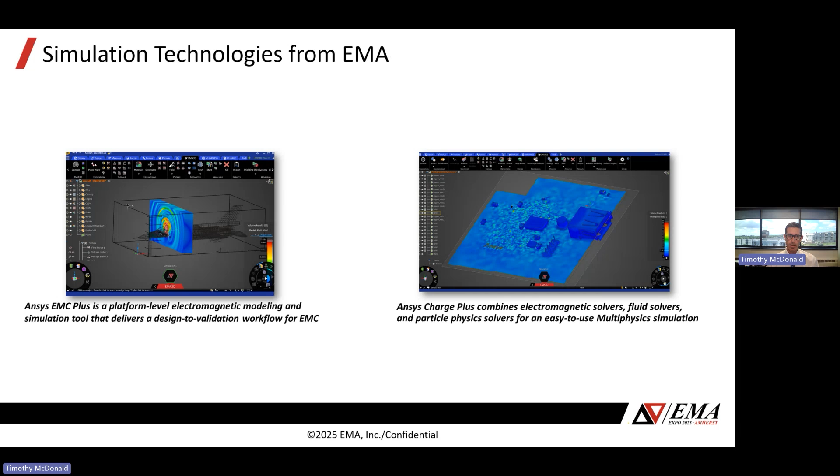Ansys Charge Plus is a tool that combines electromagnetic solvers, fluid solvers, and particle physics solvers for an easy-to-use multi-physics simulation. So this is a tool that's about extreme multi-physics, but doing so in both an advanced way and a way that's approachable and easy to use by users.

So the value proposition for EMC Plus, our goal is and has always been to be the fastest time to value. So whether that's simulation time or just the analyst time to build the model, we're always looking for ways to reduce the time between the engineer posing the problem and getting to a solution.

So that's not been an overnight thing. It's taken many decades to chip away at some of the technical challenges that get us to where we are today. So the key contributors to that short time to value are the ability to work with extreme geometric complexity.

By using a forgiving mesh, we use a grid-based mesh, and then we use hybrid subcell solvers. I'll go into detail in this first hour of this presentation about what some of those subcell solvers are, and that allows us to get the extreme complexity we're after in the shortest period of time possible.

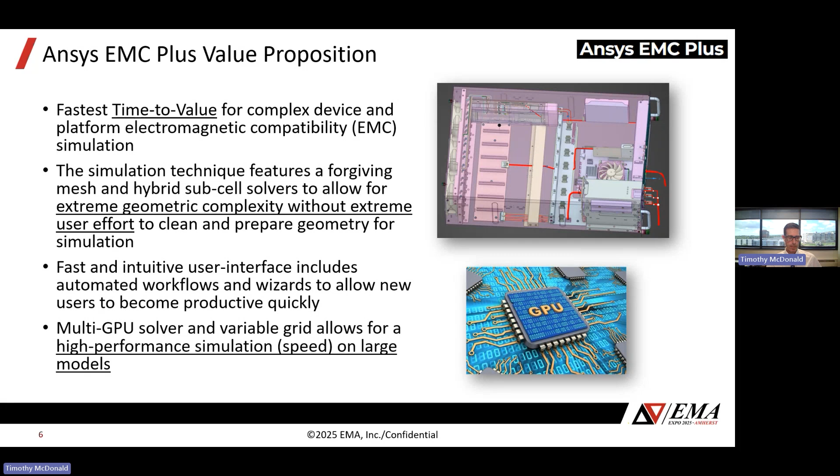And of course, that user interface matters to that. So it has to be intuitive. We have to have automation in those workflows, and then the solver itself needs to allow for high performance simulation on large models. And these days, that tends to mean accelerators like GPUs.

All right, so first example of an EMC Plus simulation that we would be going after would be just a basic electromagnetic compatibility of a system. In this case, we have a printed circuit board.

It can be a multi-layer board. That board can have components. Those individual traces into nets. In this case, some of those nets terminate on the end of cables. Those cables pass to the edge of the enclosure and then are shielded outside the enclosure. And there's a connector that interfaces the shield of the cables and the cables themselves to the enclosure.

And then fields emanate from excitations on the printed circuit board. They may go straight out the apertures in the enclosure to the receive antenna, or they may flow on the cable, go through imperfections in the shield, and then emanate toward the antenna. So there's many things happening.

Again, this is indicative of the types of extreme geometric complexity typical of EMC Plus models and the types of things we'll be solving. So I'll talk about some of the fundamental things that allow us to do this type of simulation in this presentation. Some of the later Expo presentations will go through the steps to set this up in the software itself, but today we'll be focused on the theory.

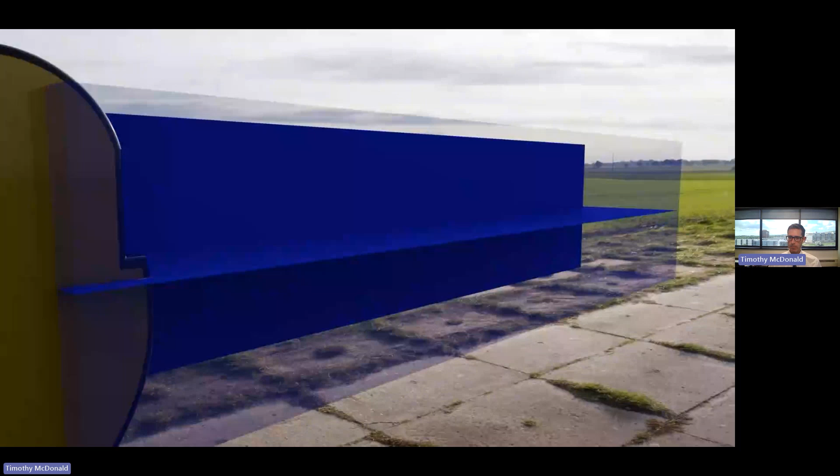The second example that I'm going to show is larger devices. So with EMC Plus, sometimes we're looking at consumer electronic devices or line replaceable units inside larger devices. But EMC Plus, with its extreme geometric complexity, can be used to model full vehicles, cars, industrial equipment, buildings, plants, things of that nature are computationally amenable with EMC Plus.

And in this case, this is a specific absorption rate simulation where an antenna that is mounted on the car in the shark fin creates electric fields that couple into the human body model. So this just gives another example of full platform extreme geometric complexity that we can pursue with EMC Plus.

Charge Plus, which Brian Neufeld's going to talk about in the next session, this is multi-physics and it's co-simulation. The goal with Charge Plus is to be accurate where needed. So it's using some very high fidelity solutions, connecting kinetic solutions with electromagnetic solves and extremely short time steps where needed.

And then where you don't need that extreme level of detail, we can relax some of those constraints and go for performance the rest of the time and make it more computationally feasible.

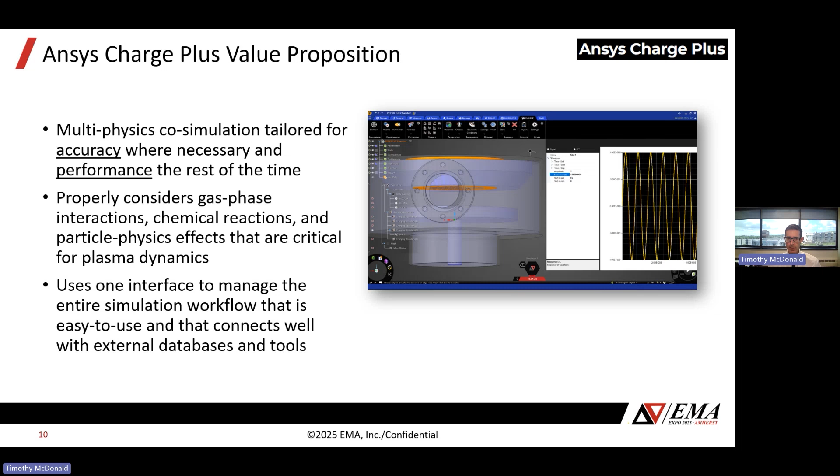This tool can consider gas phase interactions, chemical reactions, and particle physics effects that are critical for plasma dynamics. And you get one user interface, and all of it is well connected and modern in its feel and works well in connection with external databases and other Ansys tools.

So an example problem for Charge Plus that we'll hear more about this week, this is a plasma enhanced chemical vapor deposition cell, and we're seeing electrons inside this cell respond to the RF fields that are setting up this plasma.

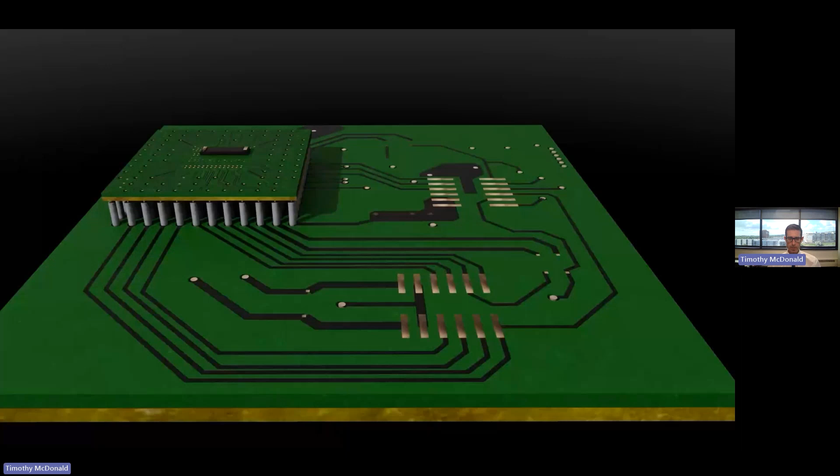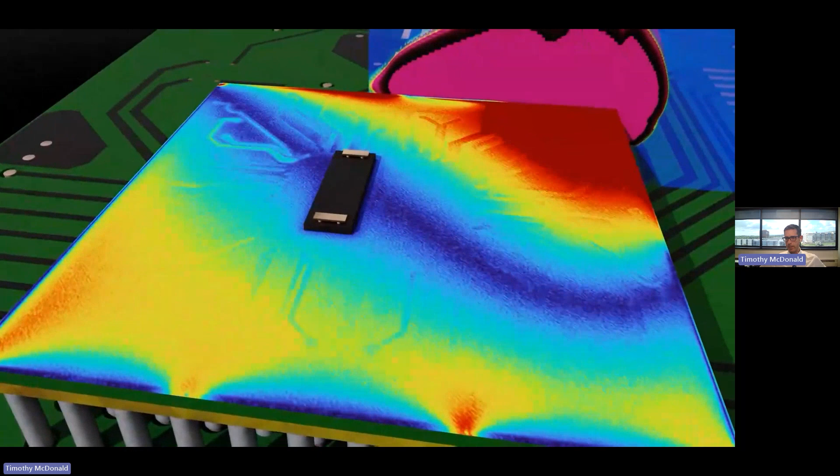Another example of the use of Charge Plus is using the FDTD simulation in Charge Plus. In this case, that's the ability to model a non-contact ESD arc. So this ESD arc creates an electrofluid interaction, and then we can see how that couples to PCB traces, nets, down to individual interposers to look at the voltage and current induced on those by that nearby non-contact ESD event.

So a couple of examples of the types of plasma arcing problems that we might try to solve with Charge Plus. All right, so for the rest of this session, I'm going to talk about some of the advanced concepts and theory for EMC Plus. So first, we're going to talk about some of the history of that.

So the first approach to the finite difference time domain, which underpins one of the solvers inside EMC Plus, was Kane S. Yee. He was a professor, also worked at Lockheed, and at the time, the innovation was to take the grid of fields in space for electric fields and magnetic fields and offset them by half a cell in the grid in X, Y, and Z. That overcame some limitations of just a naive discretization of Maxwell's equations, where the E and H fields fell on the same grid.

And the genius of that and some of the practicality of that can be seen if we just look at the individual step equations. So the step equations are just the discretized versions of Maxwell's equations. So one of those field step equations, the next time step for H in the Z direction is based on E in the Y direction and E in the X direction on either side. So you can see by staggering the grid, H of Z is right here in the center of the face, and the E fields are on the center of the edges.

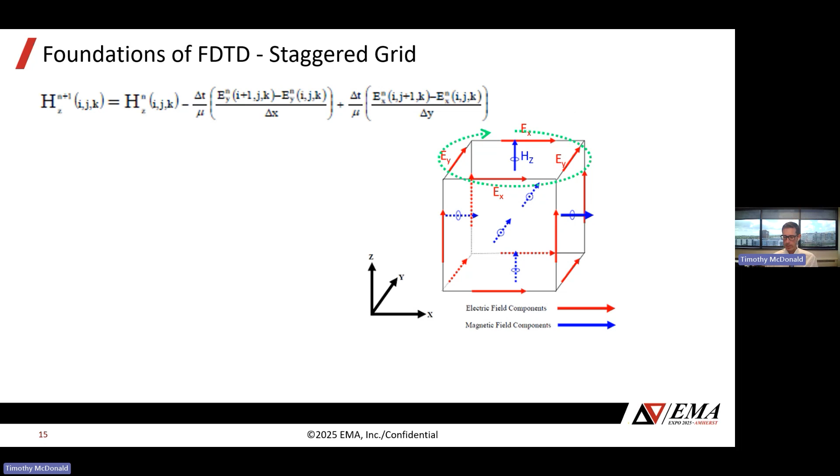So I need to difference this E sub Y and this E sub Y, and then in the second term, I need to difference this E sub X and this E sub X, and they're as close as possible to being on either side of the H sub Z. So the spatial error for that separation is minimized when we stagger the grid. This is the easiest way to visualize what we mean and why we would put together a Yee grid, named after that professor I mentioned on the last page.

And this method had another big advance by Lam in 1969, who did the work necessary to derive the condition for stability and the CFL condition, and found that as long as certain criteria are met, such as the Courant criteria, which I'll talk about in a little bit, you can guarantee convergence under those circumstances for these equations. So that really gave us the mathematical underpinning to be confident in further developing this tool and being able to use it, knowing that we'll see convergence when those criteria are met.

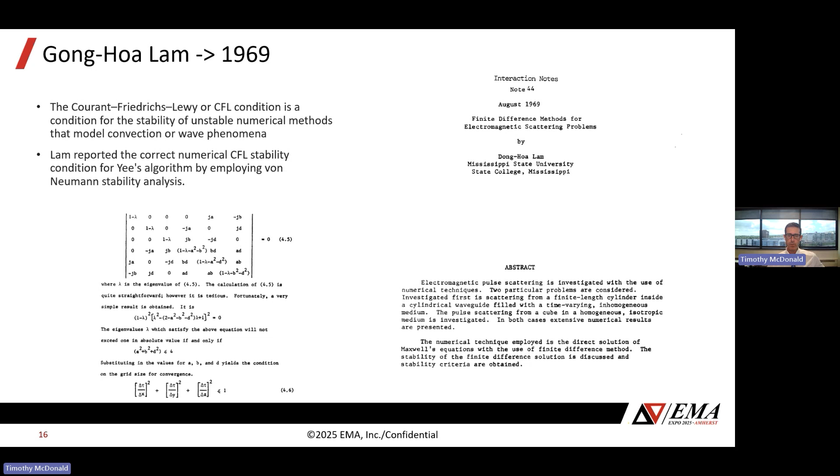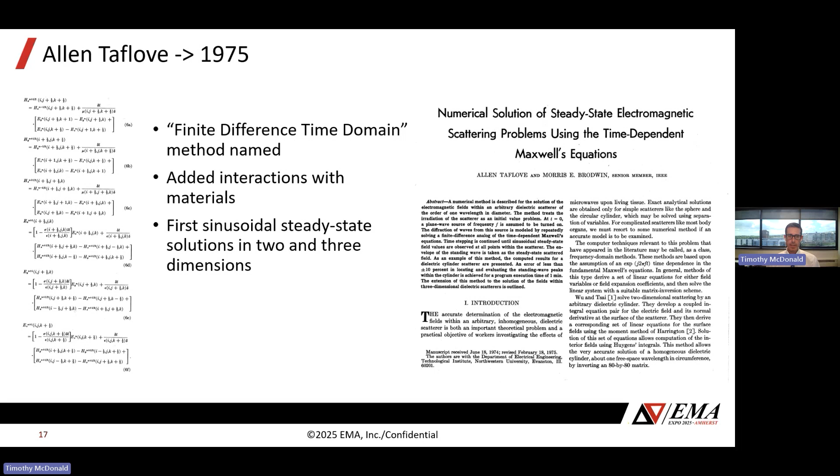And then the current form of the equations that we use were written by Allen Taflove in 1975. This is the first time we think anyone used the words finite difference time domain. He added interactions with materials, which of course is necessary to do anything practical, and gave us sinusoidal steady state solutions in 2 and 3 dimensions.

Then a couple years after that, Merewether, Holland, and Perala, in 1977 and 1978, published the first, as far as we know, the first industrial use of FDTD that made it into the literature. They were at Mission Research Corporation, and then together they founded EMA a few years later, and they were modeling the F-111 aircraft and electromagnetic pulse coupling to that aircraft. As far as we know, the first practical or industrial use of FDTD in this case.

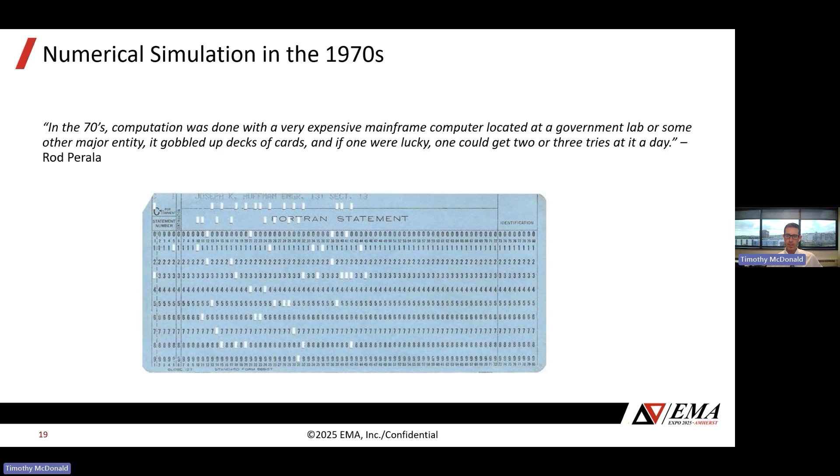There were computer graphics in that, you could type things into a terminal, but back then there was no such thing as CAD or 3D geometry in computers. So they would visualize the aircraft that they built in 2D slices on paper, or in some cases they would visualize it with Legos. Of course, FDTD always reminds people of Legos.

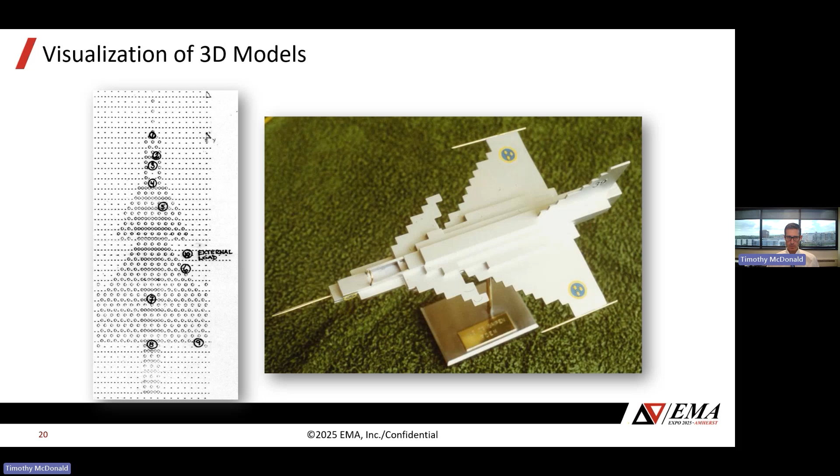And typically from that era, the Fortran code used to solve the problem would show up written out in full detail as the appendix to the reports. Of course you'd never do that today since you might have hundreds of thousands of lines of code, and it just wouldn't be practical to put that in a PDF or a paper report. But that's how they did it in the early days.

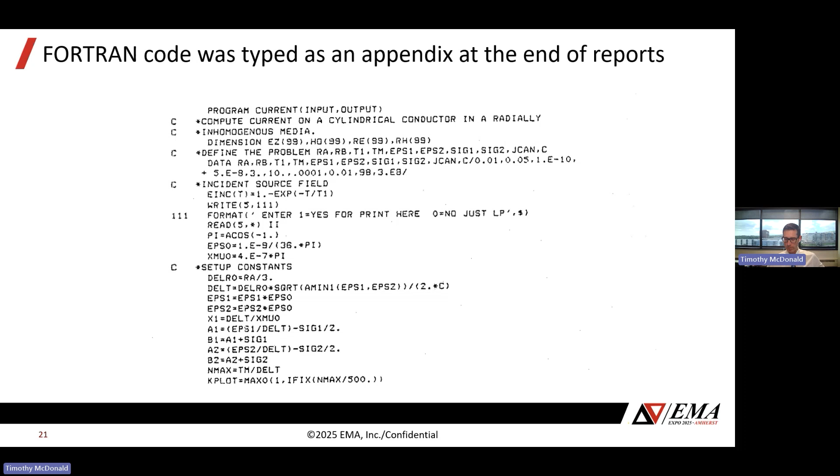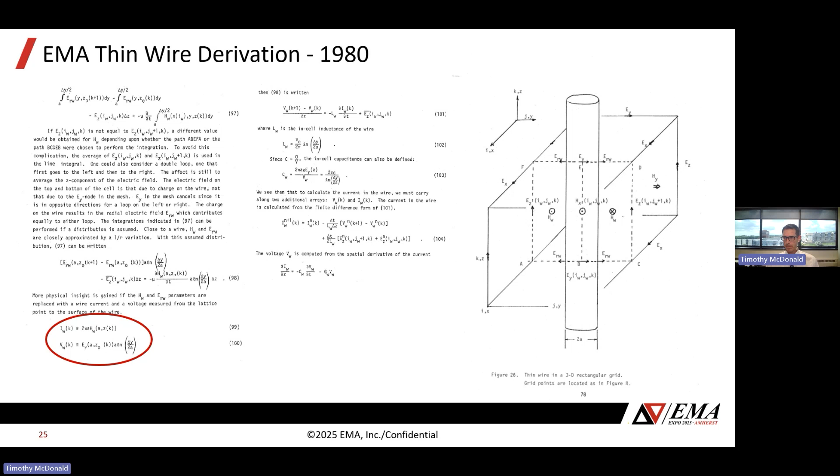A very important one here is thin wire derivation. As we start to look at conductors and wires, oftentimes they get a type of energy flowing on them that we could describe as TEM, transverse electric and magnetic fields. In that case, with a TEM, you can actually derive a voltage and a current. You can see an I and a V, which are nowhere present in Maxwell's equations, but if they couple to a transmission line, you can derive an I and a V. So you can see the beginnings of how people would be tempted to combine transmission line theory with full wave electromagnetics when you look at these equations. Even as early as 1980, you see the beginnings of EMA 3D and M-harness being something that would be tempting, tantalizing to the engineers developing these methods.

All right, in the next section we'll talk about some of these key concepts.

Now, before we've talked about history, some of the concepts in this section are going to be applicable to you as a user of these tools. As a brand new user, you don't have to know all these details, but as you start diving into these simulations and understanding why, when you change some of the spatial resolution, the simulation takes longer to run, the practical reason would be the Courant criteria.

What is this delta T? That's the delta T in the step equations. That's one of the key inputs to FDTD and to EMC Plus — the time step. Now, for new users, the time step is set for you automatically. It's intuited in some ways, or it can be an input based on the frequencies the user is trying to get at.

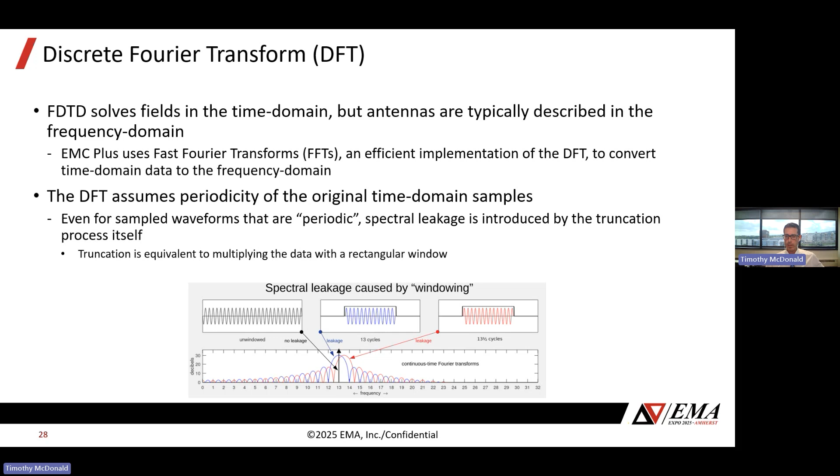Even a perfectly periodic signal, a perfect sine wave, if you stop it at some point, that's going to have some effect, some truncation present on the frequency domain version of what you come up with. So as we work with Fourier transforms, we need to keep in mind the Fourier transform resolution.

The Nyquist-Shannon sampling theory: if a function x of t contains no frequencies higher than b hertz, it can be completely determined from its ordinates at a sequence of points spaced less than 1 over 2b seconds apart. Basically what this means is we need at least 2 samples per period to resolve the frequency.

And if you get anything less than that, you're going to get aliasing. It's nicer to have a little bit more than that, but at a minimum we need 2. You can see we're not going to be able to resolve this wave without capturing at least 2 points per period. And then that has an effect on our time step.

So if our time step, we want it to be smaller than 1 over 2b. Remember, b is the frequency we're trying to resolve. If you ensure that, you'll make sure you can resolve those frequencies. For example, a time step of 1 nanosecond means we can resolve frequencies up to 500 megahertz, and it's linear in this case.

If we reduce our time step by a factor of 10 down to 0.1 nanoseconds, now we can resolve up to 5 gigahertz. That's the reason when you're using EMC Plus and changing your target highest frequency of interest, automatically in the user interface it's going to adjust your time step to achieve that based on this equation. However, there may be times you want to dial this up or down. So we do give users the ability to directly change the time step, but you want to bear this relationship in mind.

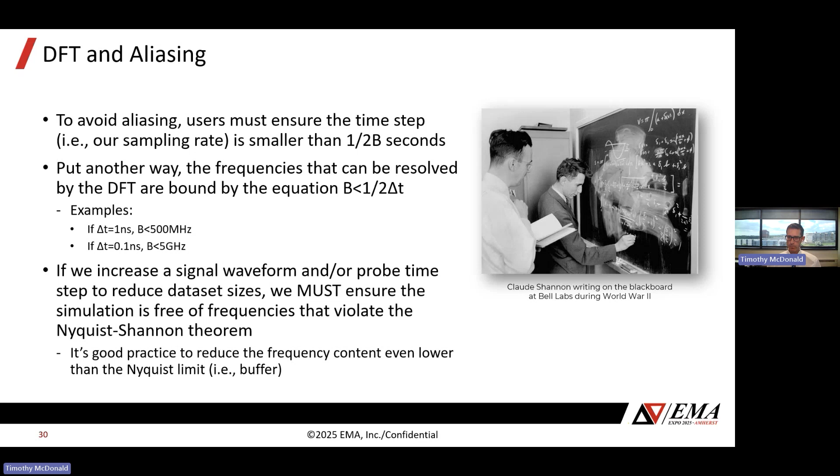Now the tool will automatically attempt to create sources for you, Gaussians and derivatives of Gaussians, that don't have too much high frequency content in them. But there may be times as an advanced user where you want to create your own source waveforms, or use measured source waveforms, keeping in mind some of these considerations. For example, you may want to filter your source before you put it in, or decrease the time step of the simulation to resolve the frequencies you're after.

There's more to the frequency nature, but those are a beginning. Okay, let's talk about meshing in EMC+. Many users may want to start looking at the input files. So when you hit run in EMC+, it's going to create an ASCII, a human readable file on the hard drive, and inside that file you can see all the specification for the simulation.

It's going to use 3 integers, i, j, k, that will describe a point in space along X, Y, Z. Keep in mind we can have a variable grid, so the grid dimensions may be larger or smaller in different locations, but ijk is going to be telling us where we are on that grid.

These numbers start at the most negative point in the domain space, defined as 1, 1, 1. And we go from the most negative to the most positive, Imax, Jmax, Kmax, on the opposite corner of that domain. And then we can create voxels in the tool that represent geometry.

So ijk by convention are going to refer to the lowermost corner of a voxel, the most negative in X, Y, and Z.

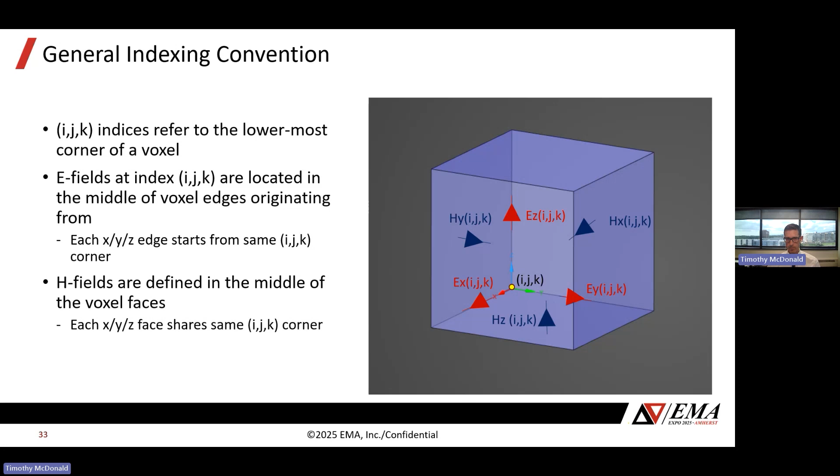Just to give an example of what that looks like: the ASCII human readable file that I mentioned before has an extension .emin. Again, it is somewhat human readable. Sometimes these files can be large, but toward the beginning, the header of the file, you can see space steps. This is going to set our global min, our global max, and our step.

This happens to be a fixed grid. If it's a variable grid, this is going to be much more complicated and a little bit harder to be human readable. In this case, the minimum point in 3D space is going to be -2, -2, -2 in millimeters. So you can see it's -2e-3 for each block: -2, -2, -2, specifying X, Y, and Z.

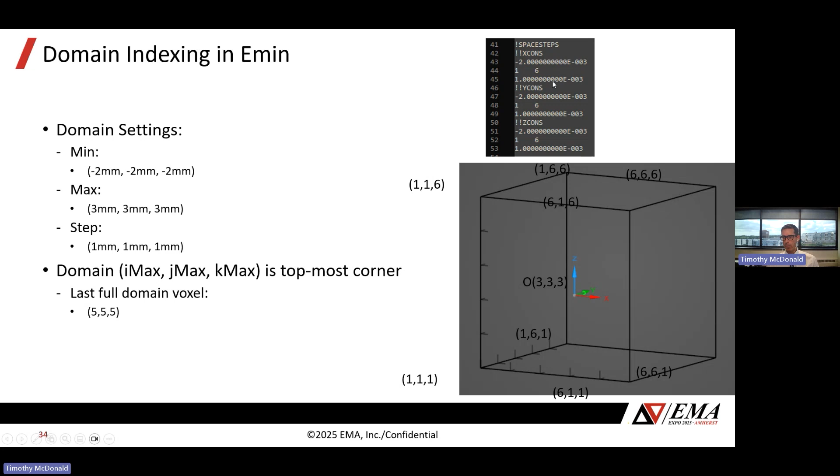And then it's telling us we are going to have 6 steps in the X, Y, and Z direction. And for each, we're going to see that the step size is 1 millimeter in each. So for a fixed grid problem, you can open up the .emin file and see what that looks like.

For bodies, you can scroll down in the .emin file if you have bodies present, or you can do a find in a text editor and find the bodies. In this case, it's an isotropic body. It's a metal body, so it's a perfect electrical conductor.

There are 2 different ways to describe bodies, 1 and 2 point definitions. In this case, we're talking about the 1 point definition. So you can see at 3,3,3, that's going to start in the middle of the domain and go up 1 cell in each direction.

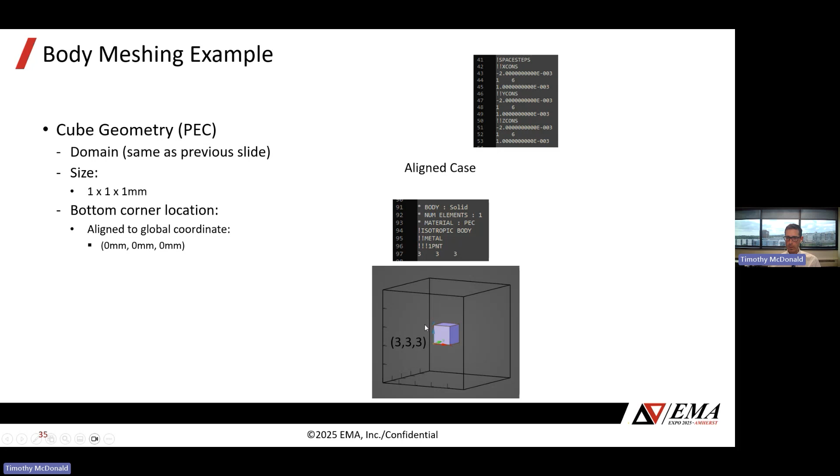So you can see what the overall domain looks like in the space step section, and in the isotropic body section, we can see what a single volumetric voxel looks like in the .emin file.

Now, surfaces are a degenerate case of the full 3D voxel, so they're just one part of the voxel. This is actually somewhat unique, to have the ability to work with surfaces and lines, subsets of the voxels.

Primitive FDTD tools may be voxel only. Some competitive tools may be voxel only. There's many helpful things in being able to work with surfaces, the faces of these voxels, as well as the edges of voxels, which are lines. But fundamentally, it's still all using the same voxel definition.

For example, the X normal surface is going to be in the YZ plane, so it's EY, EZ, and it's going to capture the HX field. For the Y normal surface, it's EX, EZ, and HY. And for the Z normal surface, it's EX, EY, and HZ. So we're not having to come up with new field definitions to deal with surfaces, but we're just picking the correct set to work through in our definitions when they interact with materials.

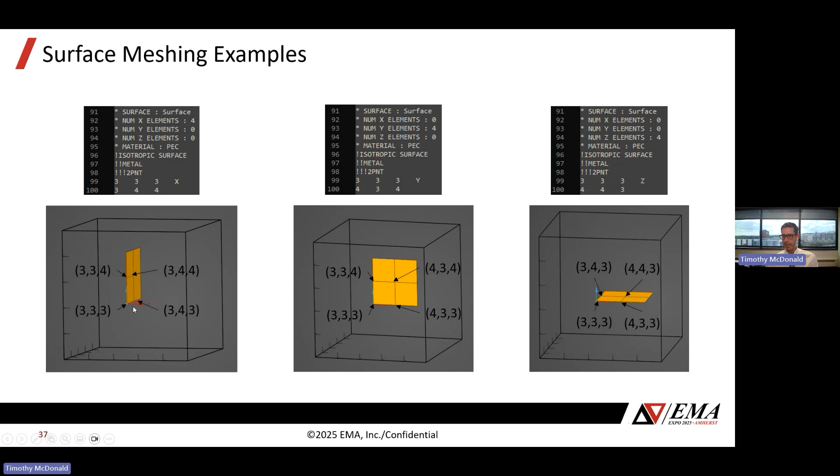You can search in your emin file to look for isotropic surfaces. In this case, we're using the 2 point definition. You can see that we have a normal direction in each case - this one X, this one Y, this one Z - and you can see how those surface definitions are rotated, and how we're defining the beginning and ends of those surfaces themselves.

These can be combined, and often are in many simulations. In this case, we have a body. That body has a definition, and then we are defining separately a surface that is a subset of those voxels. But we can take that to our advantage.

For example, maybe you have a PCB where you have dielectric that needs a body definition, and we have traces or vias that look like surfaces, and we can use larger cells by using a surface definition for them. So even though they're parts of the same voxel, we can control the properties of them when we have materials interacting with the fields in very controlled ways, by having separate surface, body, and then ultimately line definitions.

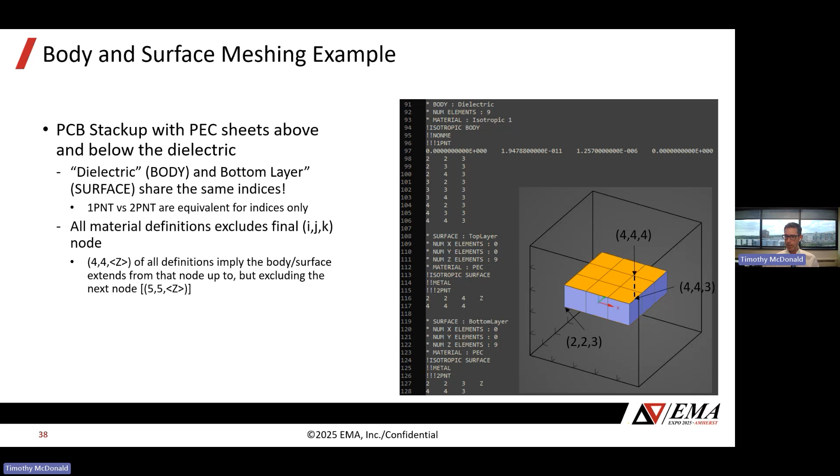There is an order of priority in EMC+, meaning that surfaces have priority over bodies, lines have priority over surfaces, and PEC materials have priority over non-PEC lossy materials. That allows us to have degenerate definitions and know, based on that order of priority, what is going to be modeled in EMC+.

Okay, let's talk about a few more general FDTD concepts. Typically, we don't, in any simulation, want to simulate the entire universe. We want to have some bounds on the edge of what we might call an air box where we stop simulating. One thing that's a little bit different in EMC+ is there's no explicit air box. You define the geometry you want to model, and the solver will automatically assume anything in the domain that you haven't defined as material is what we call background.

So you can just separately set the background. You don't have to worry about creating the negative space and the air box manually, and this makes things a little bit easier. We have the ability for the background to be linear. We can go non-linear with the background, but when we do that, we're actually using the charge plus FDTD to have a nonlinear background. And there's 10 different boundary condition types that we can use in EMC+.

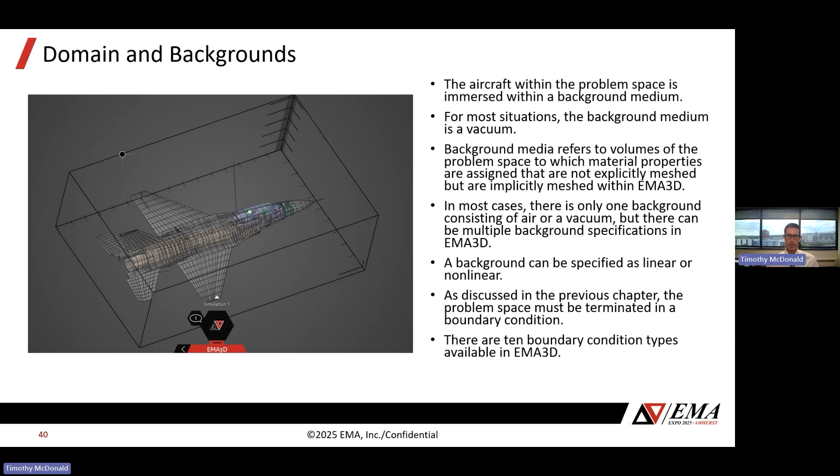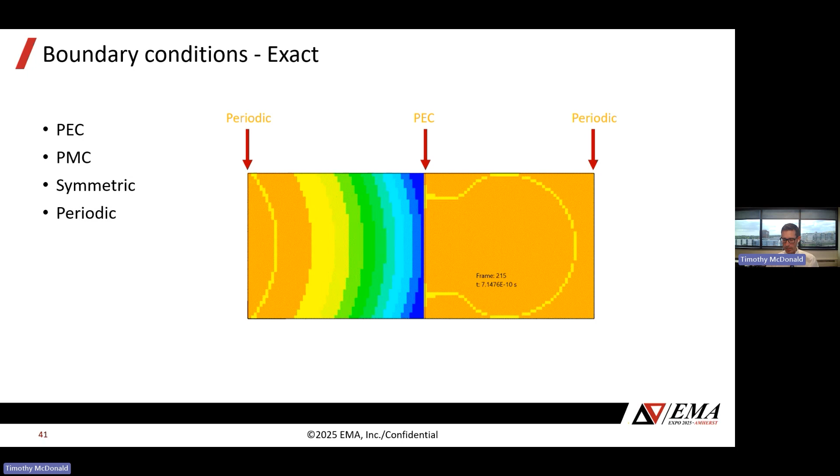We use more something like I'm going to show on the next slide, which is open boundary conditions. What they're trying to do is simulate open air. So think of this as the analog to the absorbing foam you have in anechoic chambers, where the goal is to absorb the energy and reflect back the minimum amount into the domain. That's the goal of all open boundary conditions - to absorb everything and have zero reflections, which will affect the results.

For example, MUR1H, MUR1E. MUR is not an abbreviation - it's actually the name of a researcher that first developed the MUR absorbing boundary condition layers. Fang-Mei is kind of a more advanced version of MUR.

What we use more commonly is perfectly matched layer, where on the edge of the domain we have a successive series of layers with a slightly different impedance in each layer, which really is conceptually very similar to how anechoic absorbing pyramidal foams work. In the same way, a plane wave approaching those pyramidal foams is seeing a slightly changed impedance as the plane wave moves along the foam. That's how PML works on the edge of our boundary condition.

Something to keep in mind is PML layers do take computational time. So the more layers you have, the more accuracy you have, less reflection, but it is going to take a little more computational expense.

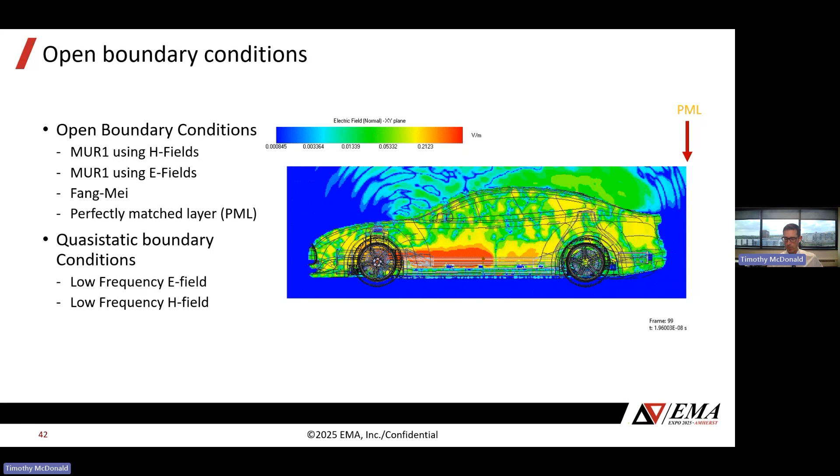And then let's talk about some of the thin material algorithms. I mentioned before that our grid or Yee-based meshing is one of the superpowers that we use to get extreme geometric complexity. Another one we use is subcell algorithms. This is where we have things that can represent something that's smaller than the cell size. Remember, I showed a very primitive thin gap and a primitive thin wire derivation.

We can actually model thin materials with EMC+. We can model multi-layer materials. We can have a stack up of different layers with different conductivity, with different dielectric properties, different permeability, and all of those layers will have an effective Yee cell material. So in the GUI, you're setting up all of those layers. The solver knows how to combine all of the material properties for those thin layers, or for those multiple layers together, to make an effective Yee cell property.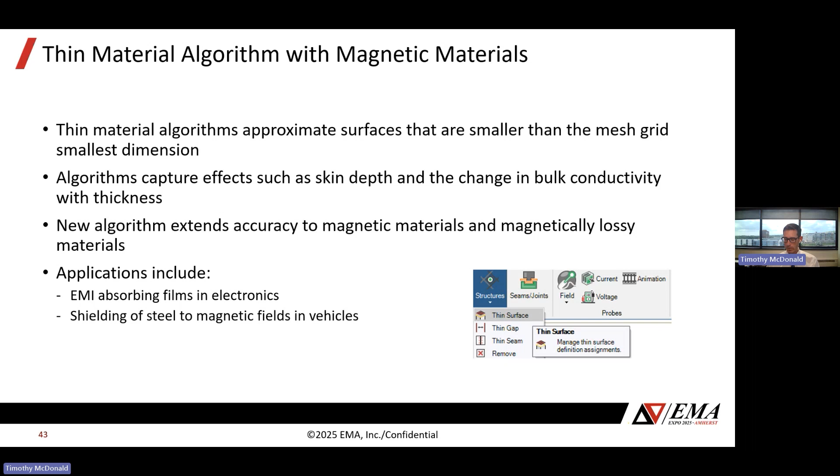We can also do the same thing with gaps and seams. I mentioned before a derivation of the simplest, easiest thin gap algorithm. These days, the thin gap and thin seam algorithms have gotten more sophisticated. You can put an arbitrary impedance between two surfaces or between two bodies anywhere you want, and the mesh engine knows ways to prevent that boundary from shorting things out on very complex geometries.

We can have anisotropic materials. What that means is instead of having the same conductivity, dielectric properties, or permeability in X, Y, and Z, we can define conductivity, permittivity, and permeability as a tensor. So we can input those nine quantities. A lot of materials are reasonably approximated as isotropic, but not all.

For example, carbon fiber materials are by design anisotropic in their conductivity. In aerospace, carbon fiber is ubiquitous, so being able to model anisotropic carbon fiber panels is important, and we've validated through real-world testing carbon fiber panels and their anisotropic properties. Usually the hardest part of using anisotropics is extracting those properties. That's out of scope for theory today, but there are special techniques you can use to extract the conductivity tensor and the other tensors needed to define those materials.

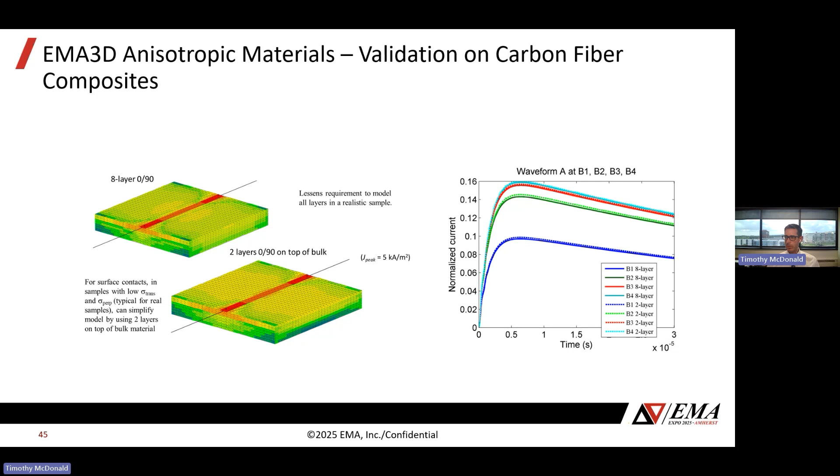Frequency-dependent materials are possible. Even though it's a time-domain solution, we can model things that are frequency-dependent. On the solver side, there's actually a lot of work that goes into making that happen accurately. What we need to do is define the permittivity and permeability, which include the conductive losses as well as the magnetic losses in this definition, with the real and imaginary parts of those.

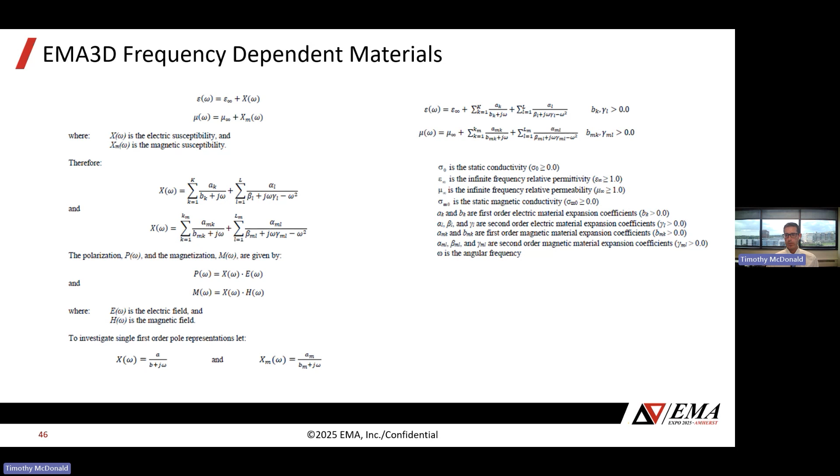Those are complex quantities. We first define them as an expansion of terms with parameters. Then an analytical Fourier transform is applied to the expanded definition of mu and epsilon, and we do curve fitting of the frequency domain version of that expansion. So users can input the real and imaginary parts of permittivity and permeability, and the software's fitting algorithm will fit that, and the parameters for that fit are the same in both the time and frequency domain. Once all that math is done for the solver and you have the parameters from the fit, we can use them in the time domain solution.

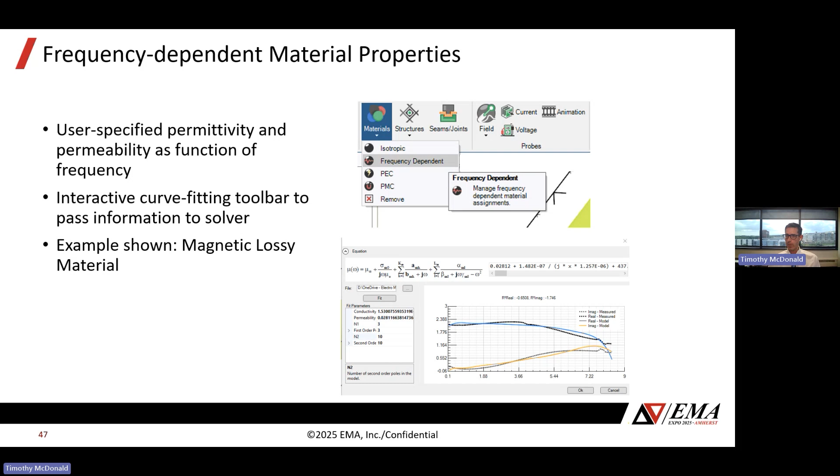As a user, all you have to do is input the parameters and hit fit. But on the back end, the solver does a lot of work dealing with frequency domain materials in a time domain solver.

We talked before about how a field solver handles all manner of E and H fields, but in certain cases we can have energy propagate in what we call a TEM, a transverse electric and magnetic wave propagation, in which case it makes sense to look at the definition for voltage and current on that TEM. A common TEM is just a transmission line, which for us is often cables.

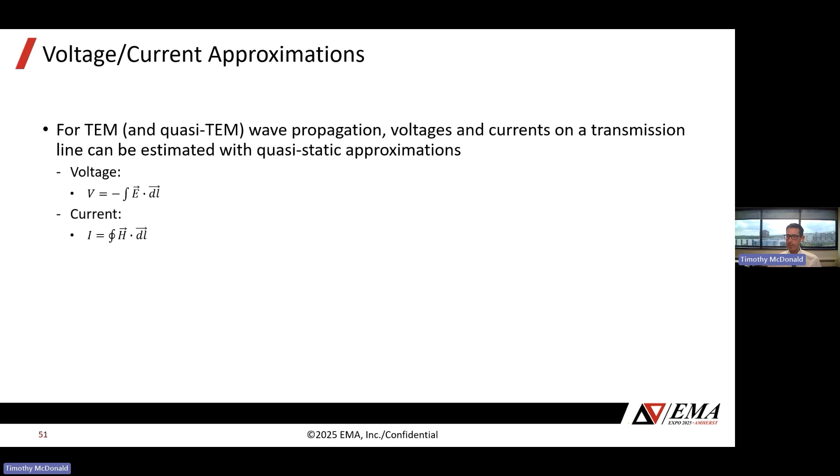Almost all devices and interfaces to devices, or antennas or other electronics that we see in EMC, eventually end in some TEM cell, or we couldn't interface them. So whenever we have cables, we probably, at least at some frequencies, have a TEM mode transmission line. So we're able to use the transmission line equations.

Many years ago, we began the effort of merging the differential equations that solve the telegrapher's equations with the general Maxwell's equations, so that we could have one tool that could solve the full field equations along with the transmission line equations.

As far as we know, this kind of hybridization of the telegrapher's equations and the full wave equations, with no approximation method and bidirectional coupling on the same grid, has only ever been achieved in EMC Plus that we're aware of. This gives us a lot of power to use what's good in transmission line theory—its computational efficiency, its ability to look directly at things we'd measure like voltages and currents—and couple that directly with the power of a full wave solver, which for EMI/EMC captures something happening in fields and waves that you can't capture in a traditional SPICE or circuit simulation. By merging those two together, this is what everybody wants, and that's really the key differentiator for EMC Plus versus other tools.

This differential equation solves for the matrices of inductance, resistance, capacitance, and conductance. All of those matrix quantities depend on the cross section of the transmission line or TEM cell. Once we've done an electrostatic solve to extract the capacitance and inductance matrices, the conductance and resistance matrices are just inputs.

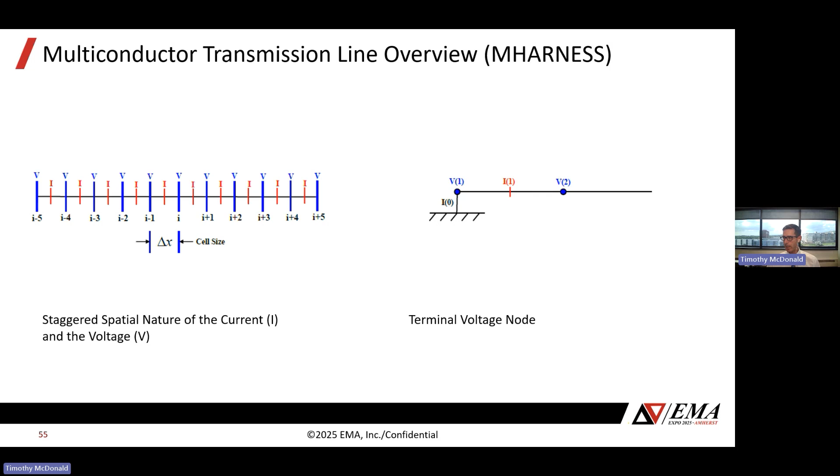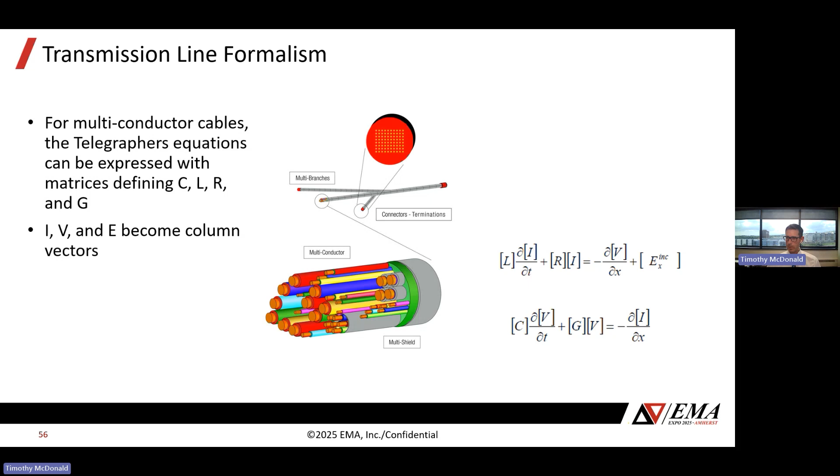Then we have to deal with the terminal voltage node, which has a set of boundary conditions we can deal with. The results are the voltages and currents on that transmission line, everywhere on it, but it's solved self-consistently with the E and H fields everywhere else in the problem. So we have one universal solution, one coupled set of differential equations, and it's the electric field that we use to couple the full wave solver to the transmission line equations.

Typically when you run an EMC Plus simulation that includes mHarness, which is the name given to our multi-conductor transmission line solver, the first step is it looks at the cross-section at each portion of the cable and does a quick electrostatic solve to get the capacitance and inductance matrices. Once that's held, it starts stepping the transmission line equations at the same time as the full wave Maxwell's equations.

By fully universally coupling our transmission line theory to our full wave solver, we can do some things you can't do if you cheat. For example, you can solve a full wave solver and just pass something in a separated way to your multi-conductor transmission line solver. This kind of two-step approach is something some competitors take, but they miss out on the ability to do some tricks that violate traditional transmission line theory.

For example, we can let wires break out of shields, we can have shields break out of overbraids, and we can have conductors terminate on each other. Other tools that can't do this can't do some pretty fundamental things in electronics. For example, we can join twisted shielded pairs at one end of the wire. And in fact, if you can't ever break a wire out of a shield, how does it ever interface the electronics on the termination on the printed circuit boards?

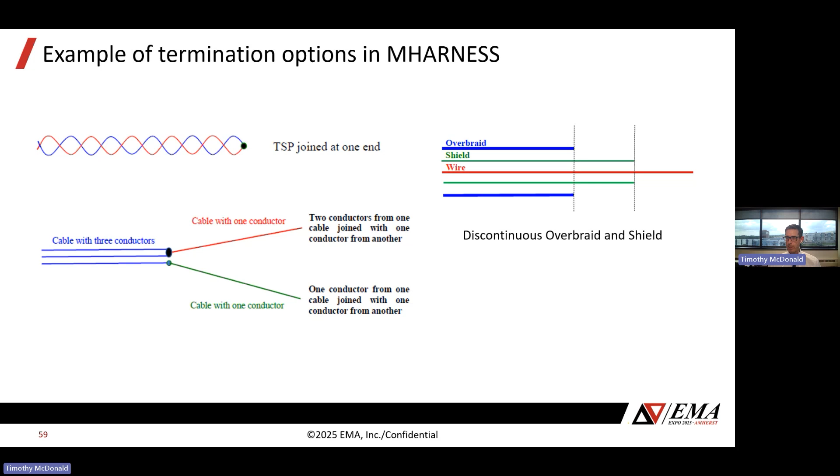So we thought from the beginning that a full universal solution was essential. It was not easy to achieve the unification of the transmission line solver and the full wave solver, but now that it's done, the industry reaps the benefits of the ability to do some of these things.

Typically there are system levels involved with transmission line theory. You make some assumption that the TEM cell inside of shields is independent from the TEM outside of those shields. The only communication that happens between those system levels occurs through the transfer impedance, which is a quantity used to describe the imperfection of shields that allow for coupling through things like braided cables.

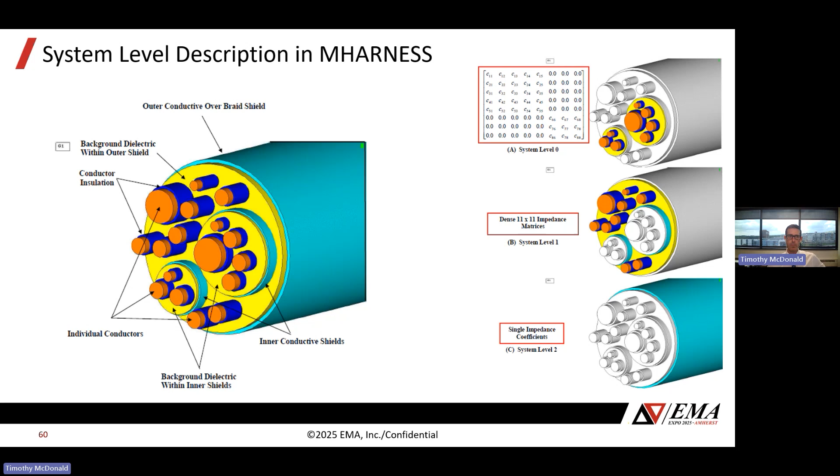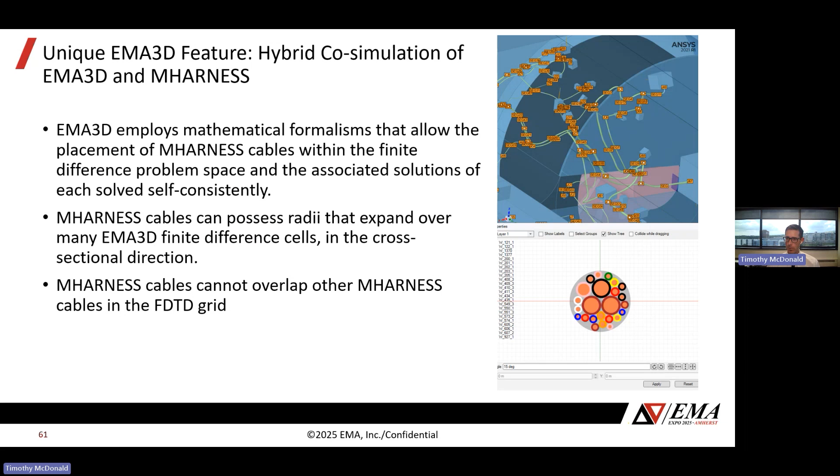When we hybridize them together, we're solving the cables and the 3D geometry on the same grid. So the Yee grid we create for MHARNESS is the same Yee grid we create for the full FDTD that we call EMA3D. In an mHarness termination example, when users are creating the lines in the user interface, they can define those terminations.

Typically people will put a circuit boundary condition whenever a line terminates on a surface. That allows us to put a linear component or combination of linear components—resistors, inductors, capacitors—on the interface between that transmission line and that surface. So that's what allows, for example, the cable to terminate on the PCB trace or something else.

Now we take advantage of some shortcuts. If a transmission line passes through a surface and the line is not split at that surface, then there's no electrical connection between the transmission line and that surface. That allows us to pass through as if it's a clean bulkhead. If we split the transmission line at the surface, we assume there's electrical connection at that surface.

So that means by thoughtfully splitting or joining your lines, defining your transmission line, you can control the nature of the bonding at those bulkheads, which is essential in EMC to getting the right answer and matching up to your design. As I mentioned before, one of the key features that surprisingly many transmission line theory tools don't have the ability to do is something very basic: break conductors out of shields. So this is just a canonical example.

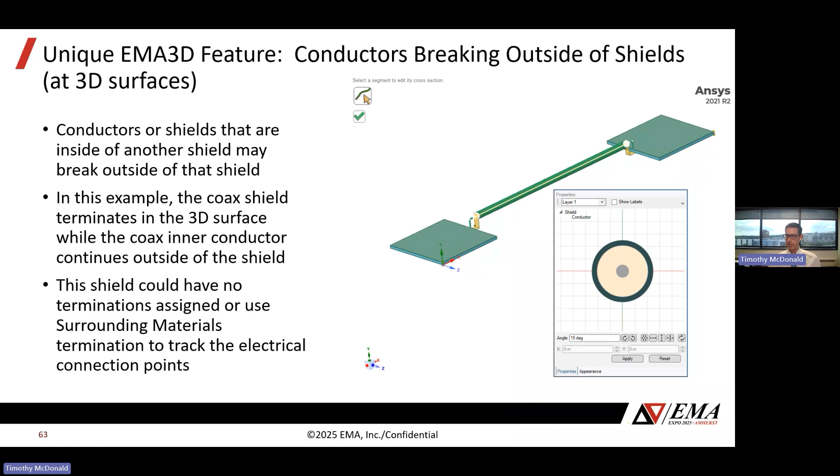You can only do this if you have a self-consistent transmission line theory that couples fully to the full wave solver. And we can even break out in air—that basically means putting a termination and just having nothing connected to that termination. Sometimes that happens in electronics or in vehicles where you have a shield that doesn't have a nice termination; what's inside that shield just breaks out electrically. So we can model that situation.

All right, now I'd like to summarize some recent feature updates. It's really hard to talk about EMC Plus without talking about GPUs. EMC Plus supports GPU acceleration. It runs on Linux.

This slide is actually incorrect—it runs on both Linux and Windows platforms. I apologize for that mistake. It can be run on multiple GPUs in parallel on Linux. One GPU is supported on Windows, and you can complete simulation in a significantly shorter time compared to CPU simulation. This can be scaled up to hundreds of times faster compared to multi-core CPU alone.

So the equivalent GPU is faster than a typical CPU that's in an engineering workstation, and GPU machines can be scaled up to more power and more efficiency than the equivalent CPU cluster. So whether you're on commodity hardware like a simple laptop with a GPU, or you're on very expensive high-performance computing—for our FDTD, the GPU always performs better than the equivalent CPU in size and cost.

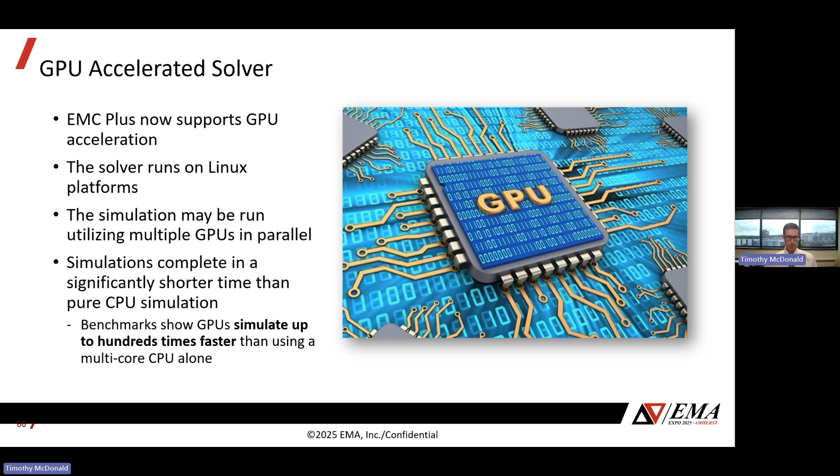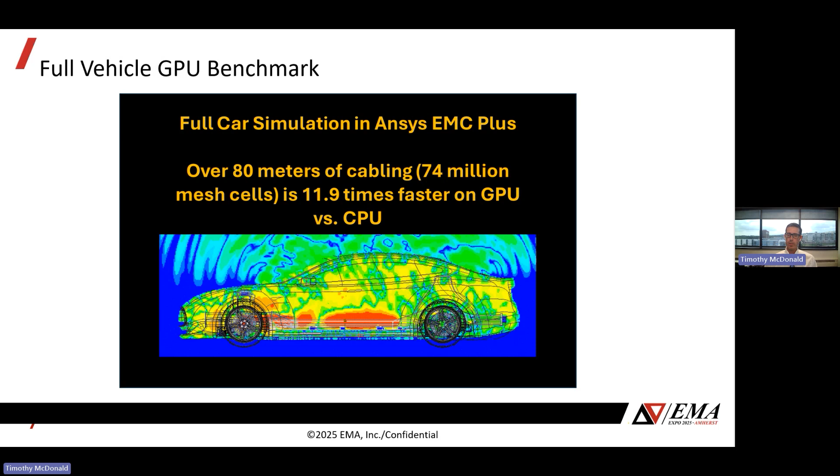Just to give an example: printed circuit board simulation in EMC Plus, broadband 3D simulation, runs 16.7 times faster on GPU versus CPU, and this full car simulation runs about 11.9 times faster on the GPU versus a CPU.

Another recent update is a conformal boundary approximation. We talked before about one of the advantages of FDTD being our ability to solve cases of extreme geometric complexity by using a grid-based cell. That grid-based algorithm for meshing can introduce staircasing, which can affect results. Conformal boundary approximation for surfaces is one way that we can reduce some of the numerical issues with staircasing. So that gives you a tool to solve that problem.

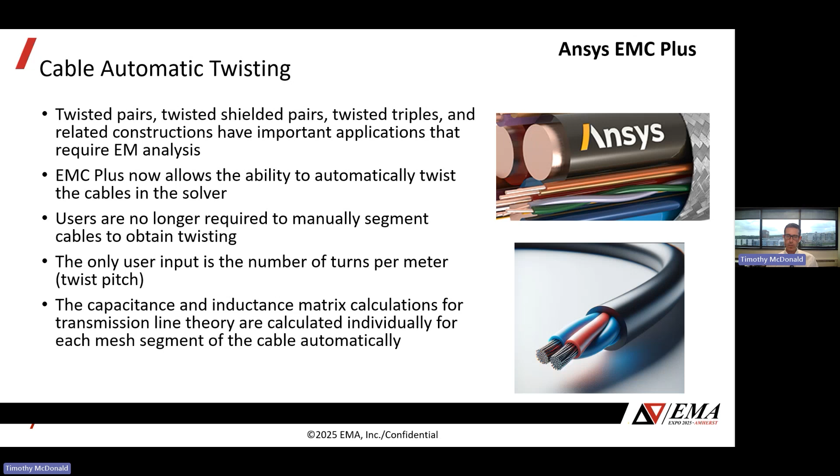Another is cable twisting. Whenever we look at cables defined in electronics, vehicles, or aircraft, often differential pairs are twisted together—it's a very effective way to reduce EMI. We now have the ability to automate that twisting on the solver side, which makes life easier for users trying to specify twisted shielded pairs.

And I alluded to this before: we've now got the ability to model thin layer materials, where this is a subcell feature where you can specify one surface, which is one part of the Yee cell that looks like a surface on the edge of the Yee cells. And we can have that one Yee cell model multiple layers stacked up together. It determines the effective properties, so you could use a much larger cell than you're modeling and be much more computationally efficient with the multi-layer tool.

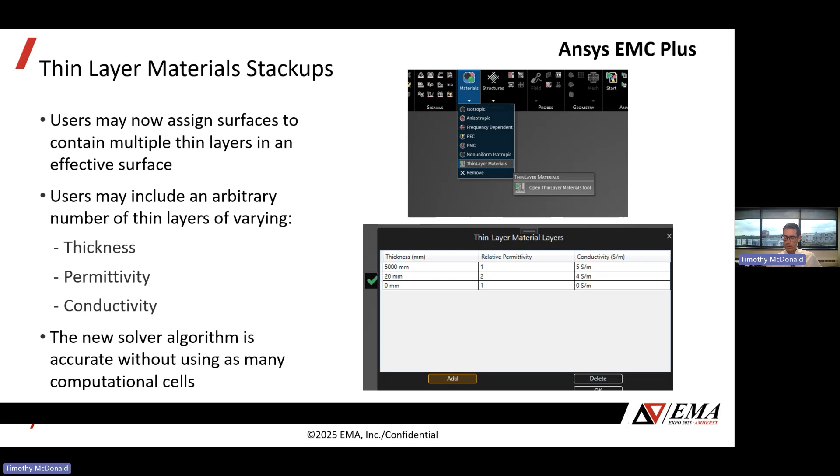Okay, that brings to an end some of the details of the theory behind the solvers in EMC Plus, which are EMA3D and M-Harness. Next, we are going to talk about some of the theory behind the solvers in Charge Plus.

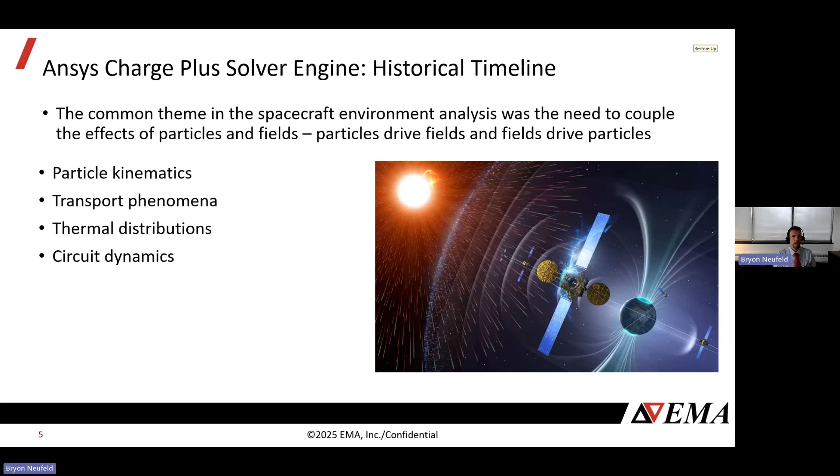Depending on what you have in your system, for example, the different chassis and things like that—all of these things on the left in the bullet points are now things that are in Charge Plus, although perhaps in a more generic context.

I had mentioned we had started probably all the way back at roughly 2008 in terms of not development, but analysis of these kinds of systems in the space environments context. But I would say solver development probably began with what we had called at the time EMA 3D Internal, which was focused on internal charging space environments. Even though this is somewhat of a niche application in terms of the industry and the scenarios you're looking at, the technology that goes into it is actually pretty sophisticated, in that there's this coupling of transport with field calculations.

And so even from that early time, we had tried to address this problem. We had worked with Larry Lallement at Lockheed Martin, and had some other opportunities to explore this kind of analysis, and tried to evaluate fields on shielded cable in this particular case. But the idea would be that your system is exposed to some spectrum, some flux of charged particles, probably electrons, and then you want to evaluate the potential fields inside the system to see where vulnerabilities for discharge could be.

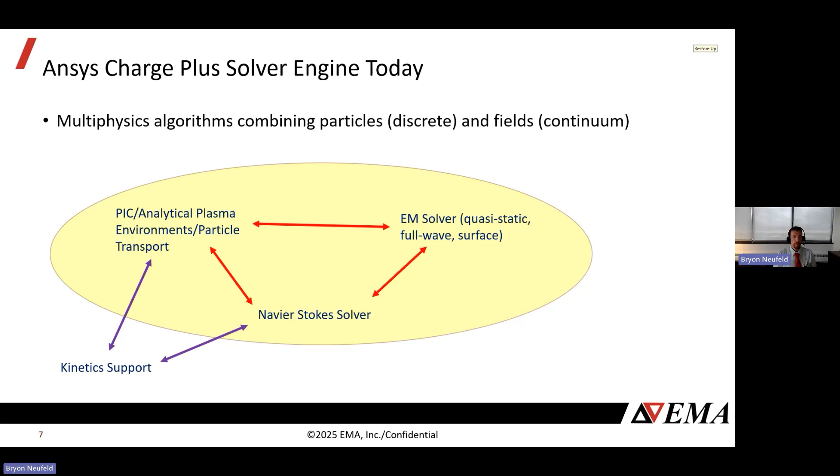So in terms of challenges, I think the time and spatial resolution, the physics scales that we try to piece together, is a big part of the challenge. For many applications of interest, there's a Debye scale involved, which is the scale at which a system of charged particles, a plasma, has screening taking place. A lot of times that scale is important for the stability of a system. However, the Debye scale for many of our problems can vary quite a bit during a simulation, going from something manageable with a mesh, like maybe a millimeter, to something that could become nanometer-type resolution. So it can be very hard to balance that kind of variation.

And then the time steps as well—just like Tim was mentioning with the finite difference, there is similarly a Courant condition. It's a bit different depending on the situation, but basically the smallest resolution in our mesh sets a Courant-type condition, and particle-in-cell needs to have small enough time steps so that a particle doesn't travel through multiple mesh elements in a given time step. So all of these things make it a really hard problem for some of the applications we look at. And the computational efficiency is always a big challenge.

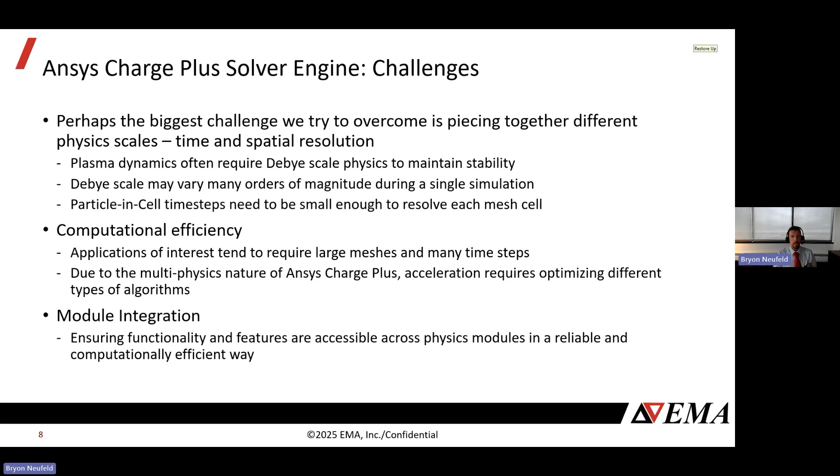We have different modules that could each function independently. This would include particle-in-cell, electromagnetic solver, surface charging, transport, and the fluid solver. But what makes this a valuable software tool is that the different modules can talk together and work together, and having those act in a reliable and efficient way is another challenge we try to face. So now I'll switch to some of the implementation.

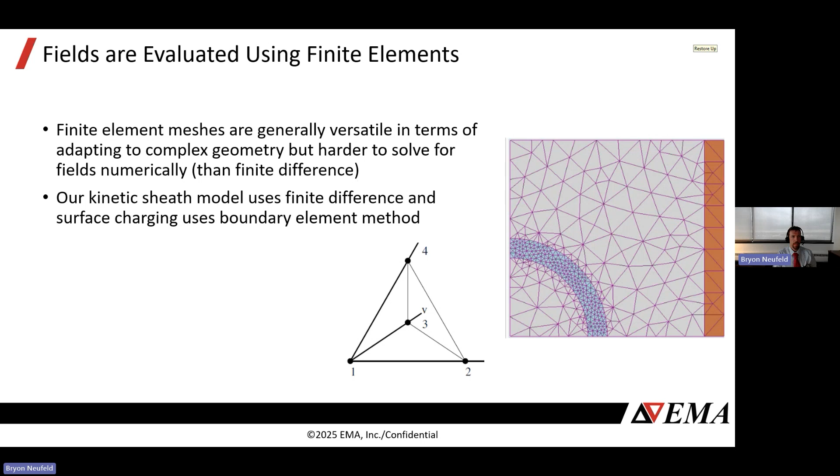For our transport, we use a spatial partitioning, like an octree, and that tends to be efficient enough for internal charging applications. For PIC, it's such an important part of the dynamic of the system to make it efficient that we actually typically don't use an octree for that. We use a different type of mapping that uses the history of a particle's trajectory to keep track in the system. That becomes an important part of a lot of what we do: to be able to efficiently keep track of particles and have fields evaluated in real time based on a particle's location, and then those fields in turn can modify the particles.

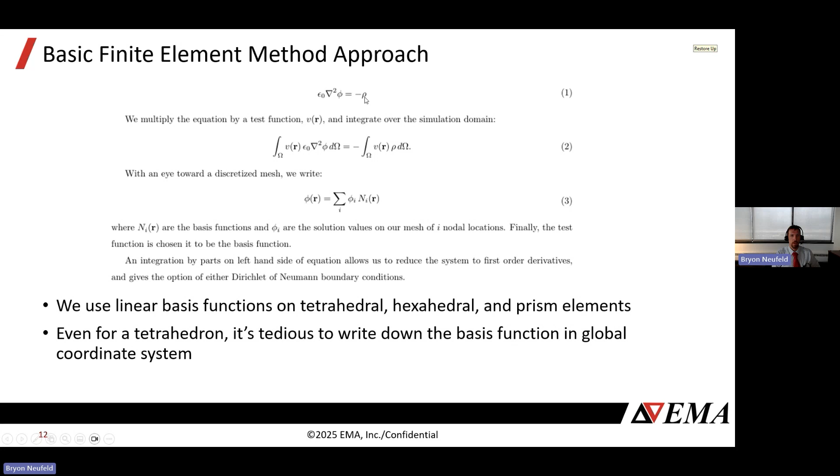And so we test our implementation. One way is to use a method of manufactured solutions. We have a driving term, so like in this last slide, if you take a right-hand side, this would be like a charge density term for a Poisson equation, but instead of using a physical distribution of charge, you could pick something you know is supposed to result in a certain solution, and then check the accuracy of the solver for that.

And here's a couple of examples on a unit cube. We're just showing a cross section, but this would be a three-dimensional cube, and we can calculate the error of the solver based on what the exact solution should be. So it's a powerful way that we can test the implementation and make sure we're solving things accurately.

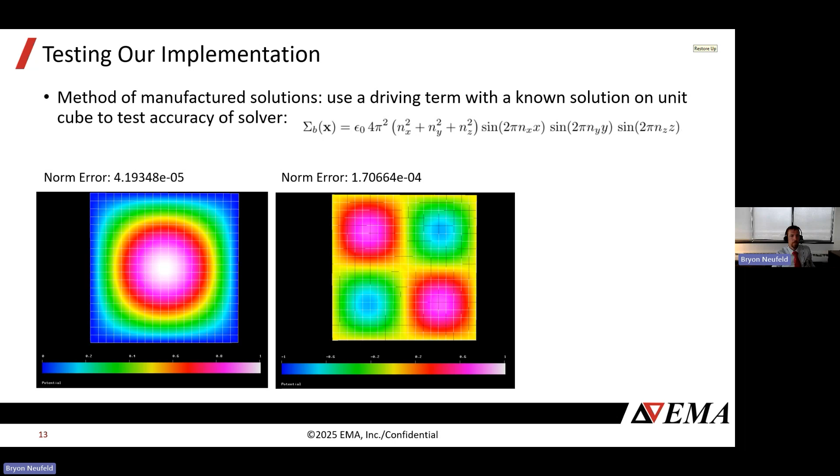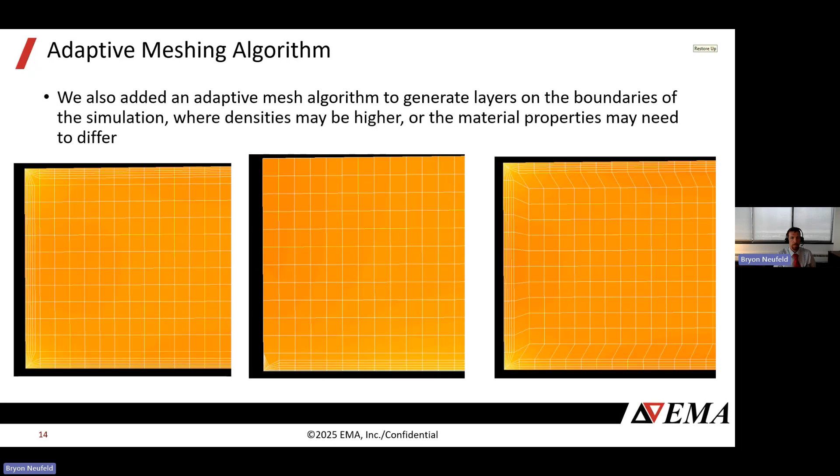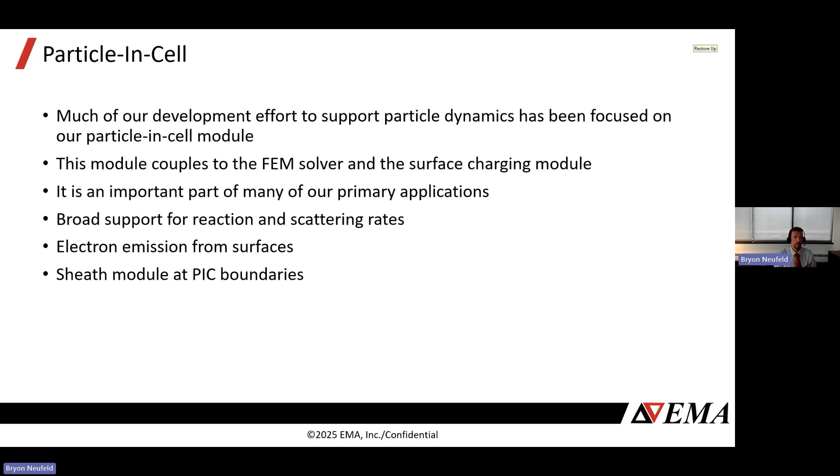And then we do have a sheath module as well that is important for the high density systems. That is like an approximation. It'd be very hard to model sheath resolutions in a mesh and maintain computational efficiency, so we have this sheath module that helps stabilize the system at boundaries.

It's a very powerful idea because, as we mentioned several times, the particles and the fields kind of go back and forth together. So the challenge would be, could you set up a system that could guarantee to conserve the total sum of kinetic energy plus field energy? So one or the other might change, but the total sum between the two should stay the same. And what this paper shows is that this algorithm is unconditionally stable. In other words, even if the Debye length is not resolved in the mesh, this simulation will remain stable.

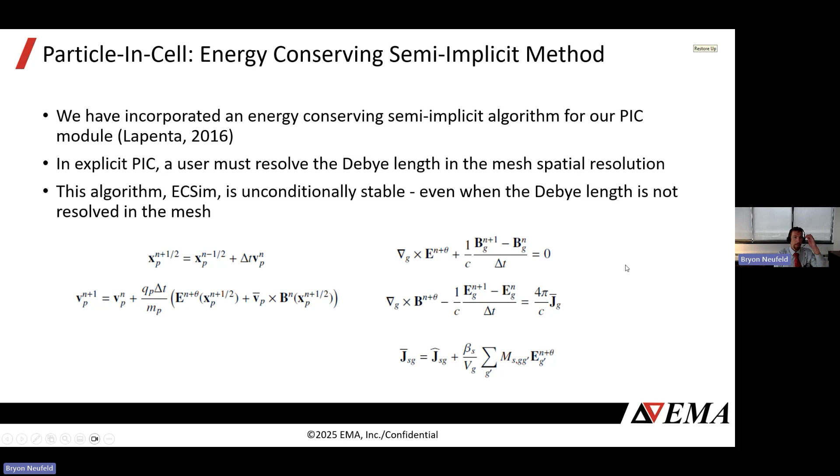And this is not true in explicit PIC. Systems can go unstable when this Debye length is not resolved. But this is a very powerful algorithm, and some of the equations are shown there, but the core idea for it is in the stepping equations. The implicit part is that you're evaluating fields at a time step, the plus half time step. So you're incorporating the E field into the equations of motion such that you're adding a term into your Maxwell's equations, and then you get this mass matrix term that's shown here. It's a very powerful algorithm, and here's an example where we run a simulation for a system.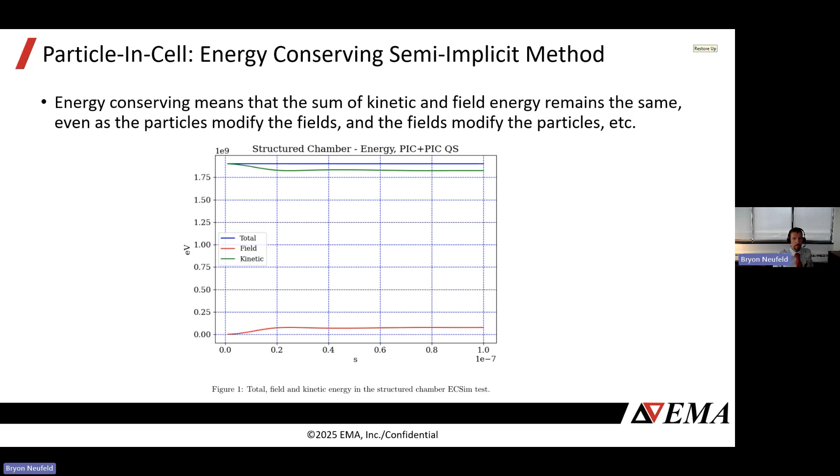This is a structured chamber model, but the idea here is that we're tracking, using ECSim, the total energy in the system. There are reflections on the walls of the system, which are elastic reflections, and there's no boundary condition in terms of a potential driving the system, just fields and charged particles with motion that interact together. It starts out with basically all kinetic energy, and then the kinetic energy drops some as the fields develop in the system, but it all maintains the same total energy. So it's a really cool formalism, and helps with a lot of stability issues.

So let's look at some applications, and I want to first look at some discharges. I have to give credit to Jacob Johnson, he's done so much work on these discharge problems and plasma conductivity. He's added stuff here that shows how the UI lets a user define a bunch of different reaction rates. There's so many things that go on in these systems, and they're critical, as he says, to get validation with what's seen experimentally. This allows the user to support high fidelity reactions, and it also has analytic definition when the cross-section data is not available.

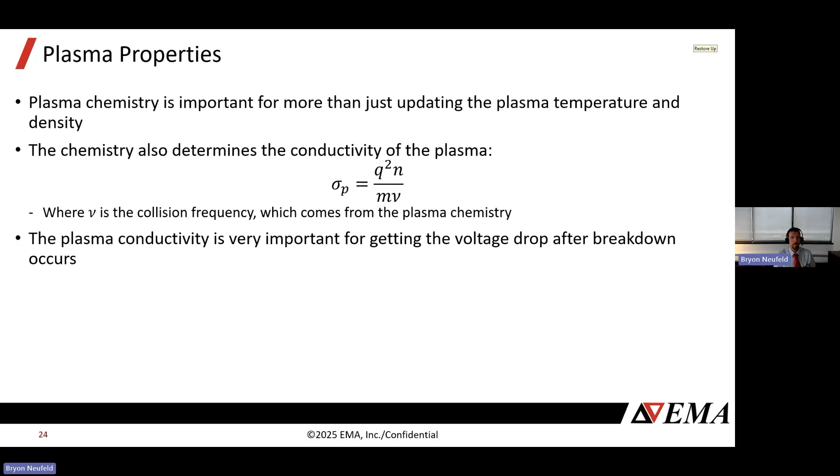As I mentioned before, in these models there's a plasma conductivity, which describes how the charge particle distribution is interacting. Getting the plasma conductivity right is very important for getting the voltage drop after the breakdown occurs. He's included this animation, which I'll run. He's got this system driven by a current source, and he tries to replicate the experiment in a reference paper on the breakdown voltage. You can see the electron density there as the breakdown occurs. Really cool stuff, this is all being simulated. He's got the potential, and he's able to get an error within 3% of the reported breakdown voltage. So really accurate simulation, really impressive work.

So let's run it one more time there, you can just see it again.

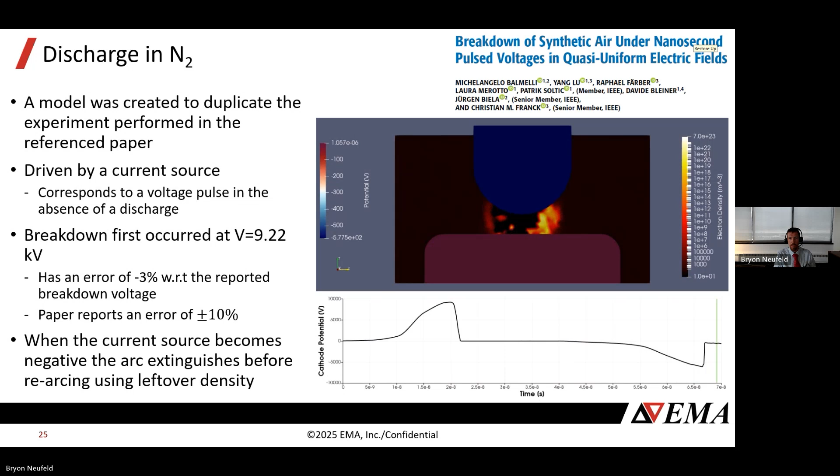Looking ahead for some of the discharge applications: more complicated gases, three-body reactions, relativistic corrections, an AC signal, surface reactions. That's something we've been working hard on, and we keep adding complexity. So a lot of cool things going on with that.

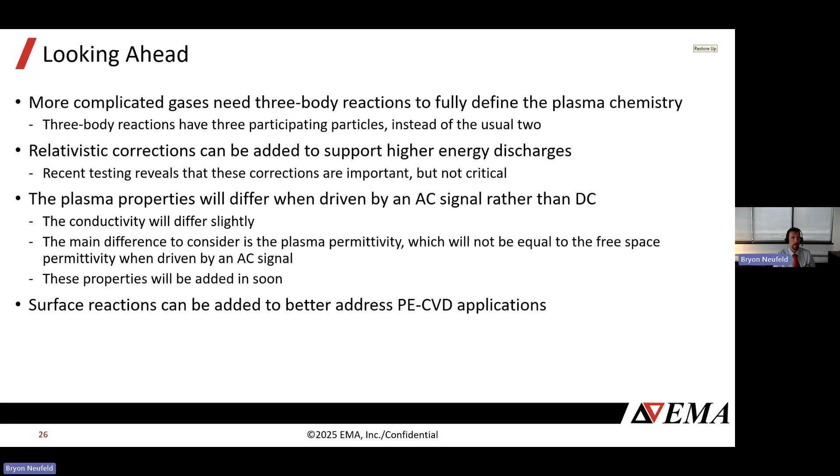One of the new features here just recently, that will also be... well, I don't want to say what's going to be in release, but this was something we added recently: space charge limited emission. Really complicated analysis, has relativistic corrections. It's been carefully analyzed and tested. Just a really sophisticated way to model this kind of dynamic in the system.

So here's an example of some scoring volume results, ionizing dose. This is obviously a really complicated looking system, but it was something that was able to be done with the standalone transport and get some of this engineering feedback for a complicated electronics box. And by default, you get charge, dose, and fluence.

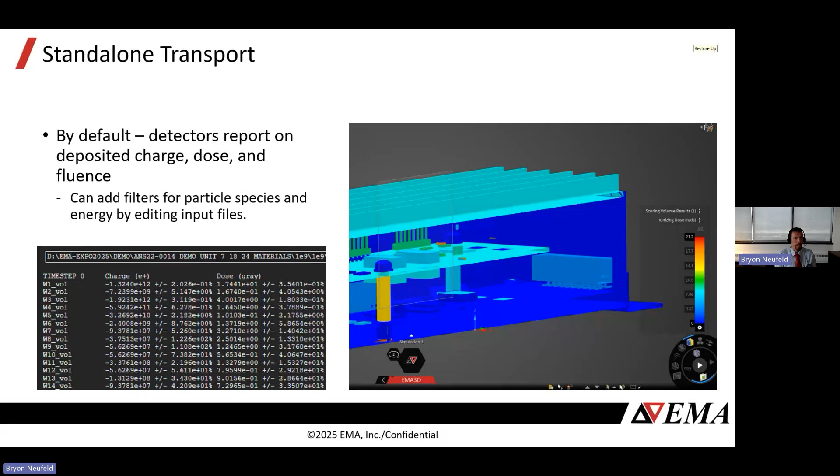And then there's an outlook for adding the GPU accelerated electromagnetic physics list. So those who are interested in highly complex rad hard analysis, this would be a really helpful feature that should be coming up perhaps by the next release cycle.

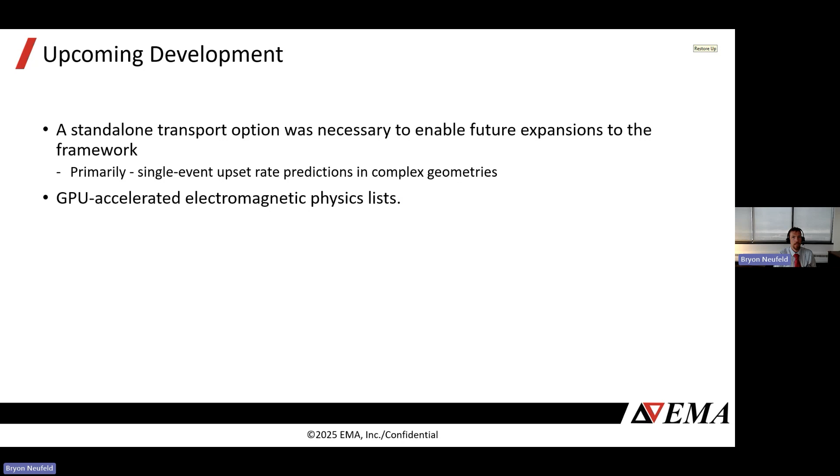Something I wanted to include was on our RF plasma simulations and circuit solver module. One of the things that over the last few months we had really been excited about was our ability to model capacitively coupled plasmas. This, as mentioned before, was one of these systems that varies over a lot of orders of magnitude in terms of the density and temperatures as well.

But the stability is really tough for a system like that. The density scale can easily be 4 or 5 orders of magnitude smaller at saturation than it is at initial condition.

So one of the things we added - the ECSim mentioned before is a big part of modeling these systems and helps with stability, but we also added a circuit solver module. Tim had mentioned before how the FDTD code has such powerful transmission line coupling and things like that. But we have this circuit solver module that couples to the boundary conditions. So you can have a power boundary condition, some sort of voltage condition, or resistive boundary condition, and the voltage varies as the system evolves.

This was one of our validation simulations with the Gaseous Electronics Conference RF reference cell. This is a system of argon that ionizes as it heats up, driven by an RF source. Greg Wilson, one of our application engineers, put this together.

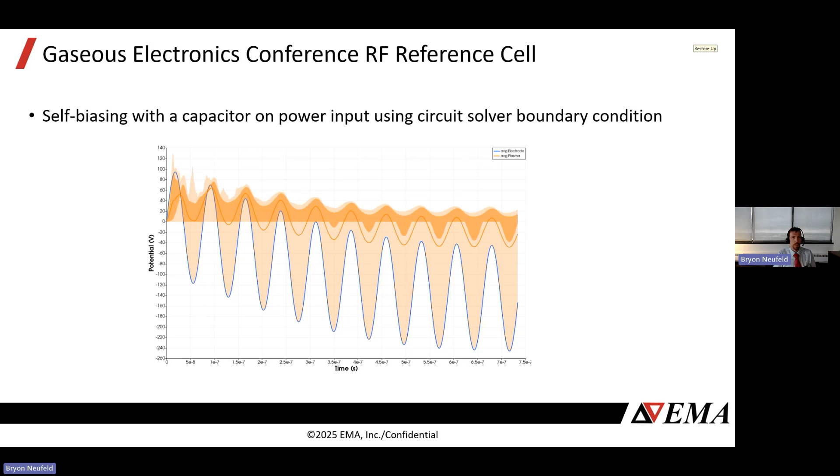One last slide regarding this was this system that shows a self-biasing using our circuit solver boundary condition. This shows the circuit solver actually adjusting to the charge incident at the boundary, and then the baseline signal, which would have just been a sinusoid, gets shifted with this biasing term. So the circuit solver module provides a lot of usefulness for engineering, in the sense of modeling the boundary of the system and how that changes over time based on whatever's driving the system.

So a few things on the acceleration and testing. We did a solver refactor in the first half of this year. We've been trying to improve both the memory and simulation effectiveness of our simulations.

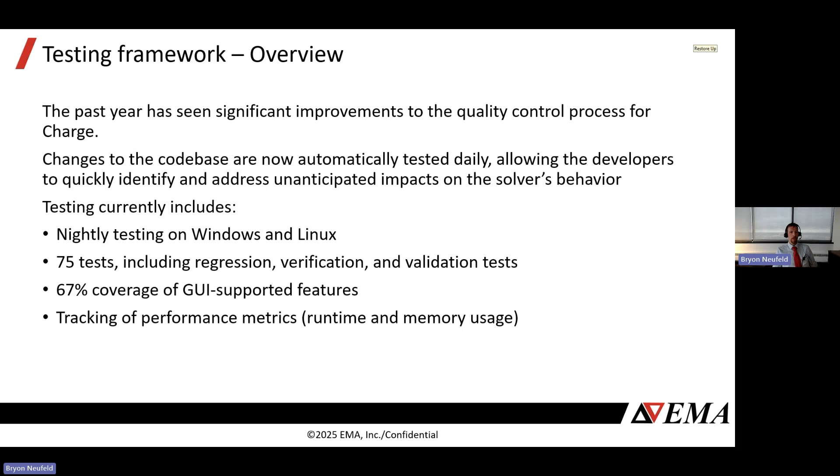We looked a lot at our MPI structure and how we do data exchanges and memory storage. We've also added, over the last few years and especially the last year, a lot of improvements in our testing framework. We have a bunch of tests that get run anytime there's a push to the code base, and that also tracks performance metrics.

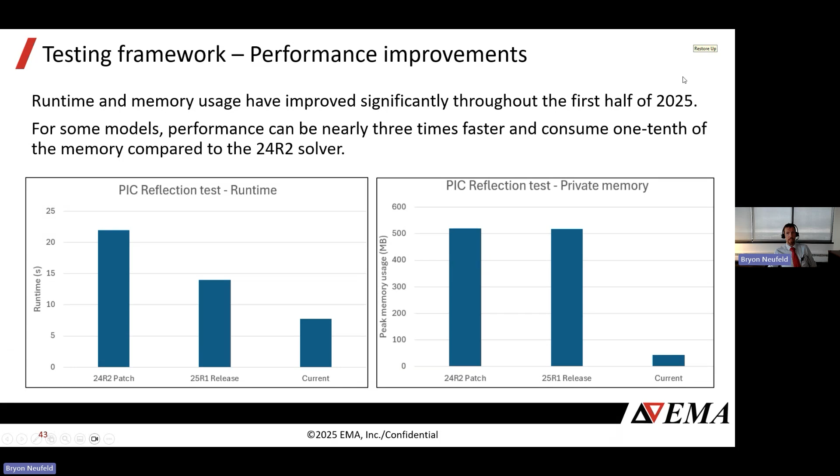One of the neat plots here is looking at one of our PIC tests, the runtime and the memory usage over the last basically year, maybe a little over a year. You can see the runtime for this PIC model, one of our benchmark models, has dropped probably by a factor of 3, and the memory usage is down by probably more than that - that might even be a factor of 10. So we really worked hard on that.

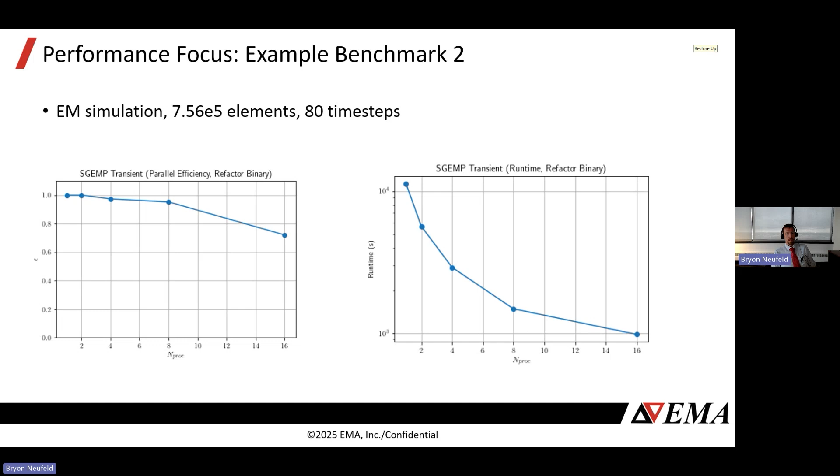And then this was one of the examples using a more complicated model, and this one shows really good scaling with the number of processors, really good parallel scaling. So just to kind of wrap it up here, goals and near-term outlook.

We want to get the GPU accelerations added. That hopefully would provide some really good performance improvement and would be straightforward to implement. We're also looking at some more sophisticated methods in the finite element solver that will help with scaling over large scale problems. In other words, if your model goes from 100,000 elements to 1,000,000 elements, does the solver converge as efficiently for that 10 times larger system? For multi-grid methods, the answer is yes. It's hard to implement, it's complex, but it could provide great scaling for very large problems.

We're looking at some things with our basis functions as well, and continuing to work on our applications, many plasma applications. We have focus on some antenna work and the rad hard stuff I mentioned before.

So that's the end of the slides, but thank you for everyone that joined today's meeting, and we can certainly open it up for questions.